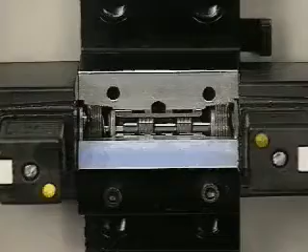Switching of directional control valves means overcoming spring forces, friction, lateral forces and seating thrust. This requires solenoids with sufficient power. And to ensure safe functioning of the solenoid, the heat generated by the coil has to be limited.

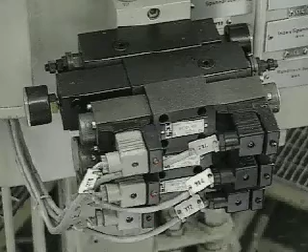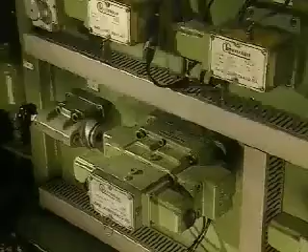The solution: the solenoids used are kept as small as possible. In order to nonetheless achieve the required force for switching large directional control valves, the energy of the compressed air or hydraulic oil is used to switch the valve. This process is called pilot control.

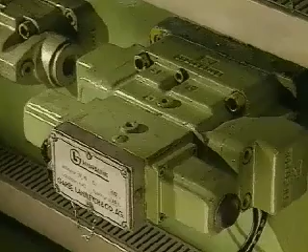This pilot-actuated spring-return 5/2-way valve demonstrates the principle clearly. A channel in the valve branches from the pressure line to a spring-loaded poppet. If the solenoid is energized, the poppet is raised and compressed air can act on the control piston of the valve, which switches against the pressure of the return spring.

What is the sense in all this? It requires considerably less magnetic force to open the control channel for the compressed air than for the solenoid to switch the control piston directly against the force of the return spring.

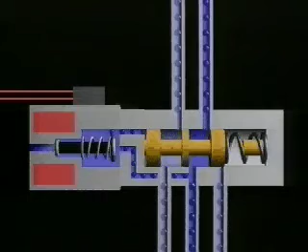Pilot-actuated double solenoid valves are also used.

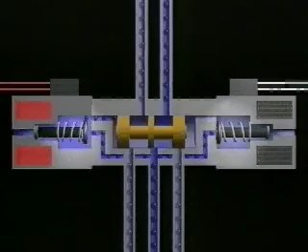In electro-pneumatics, pilot control is used to allow solenoids with minimum possible power to be switched by an electronic controller. In electro-hydraulics, only larger directional control valves are pilot-actuated, and these are driven electrically via a relay or contactor. The reason? Smaller solenoids are cheaper, and the solenoid valve is cheaper overall.

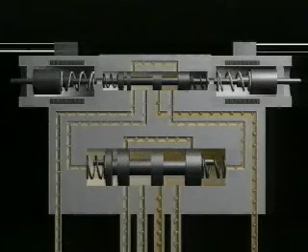There are two types of pilot control. The pilot valve switches the power valve either with the aid of the normal working pressure of the hydraulic oil, or with a separate lower pressure that is applied via a different port. The latter method results in smoother switching of the directional control valve.

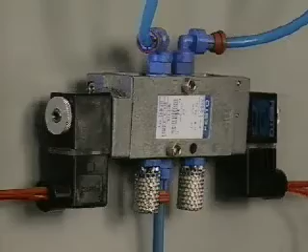Solenoid valves are normally equipped with a manual override. This allows the valve to be switched not only by the control signal, but also manually. Here, a screwdriver is being used. The manual override is used during setup of the system or for testing the function of the valve.